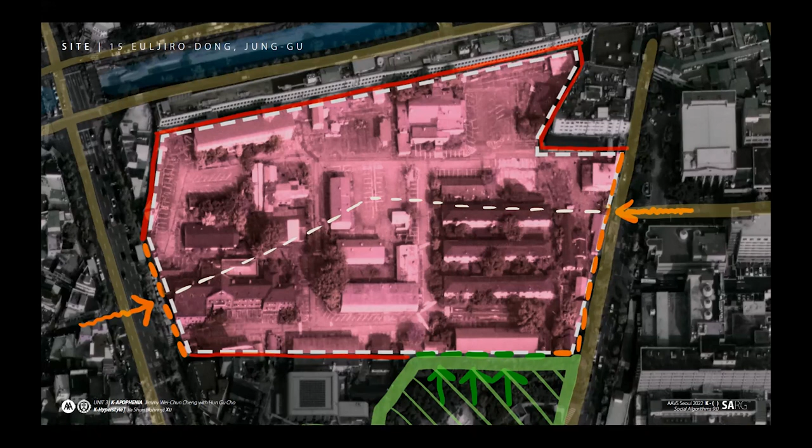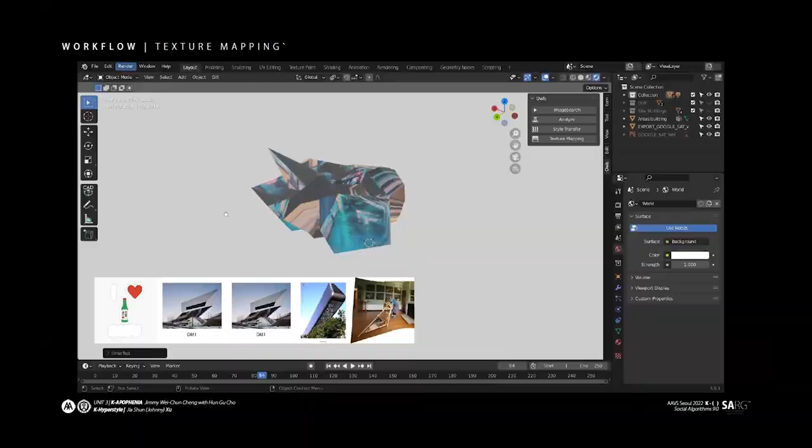We can see that the machine vision believes it closely resembles a soju bottle sticker as the first image at the bottom left, and the works of Daniel Libeskind and high-tech architecture. Finally arriving at our generated outcome, the next steps will look to apply components, sort of as a facade, and then the internal program to further refine the project. Thank you.

The following models are the result of texture mapping and complete additional work. The image at the bottom is a picture that reanalyzed my finished model. I chose the last of these three alternatives, and the result of developing this model is this.

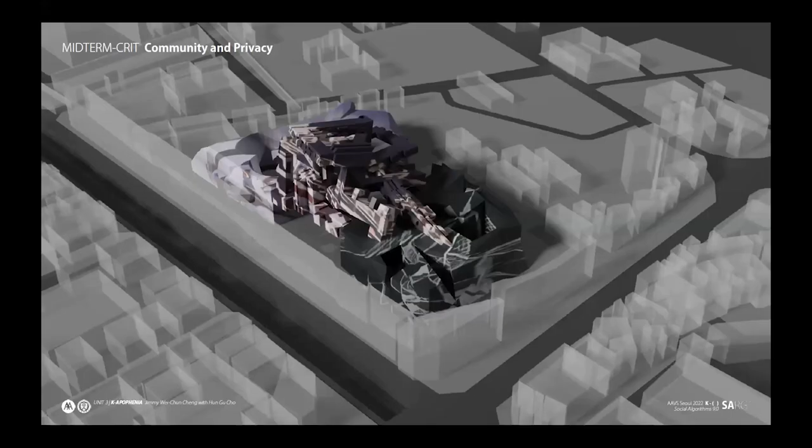I tried to divide the wasted open space into small pieces and save it as small spaces so that space can be actively utilized. I imagined a city that everyone can enjoy, but also gives them their own space, creating a harmonious relationship between community and privacy. So I created a mesh that connects a community space with curved void and privacy space with straight void into a finely divided intimate private space.

And this is the result of re-image search and development according to analysis. I will continue to develop efficient space composition and layout. Thank you for listening.

Hi everyone, I'm Yerin. My project title is The Stacking City. Before we talk about the project name, first I want to tell you my thinking about Seoul.

Korea is a country with higher economic size and population density compared to its land. Rapid economic development, which began in the 1970s, resulted in a vertical extension of volume. High-rise buildings stacked with different programs are densely packed, composing an image of a single elevation. Further, as a means of urban regeneration, the act of destructing and rebuilding has been repeated. Numerous cloned roads connect these dense volumes.

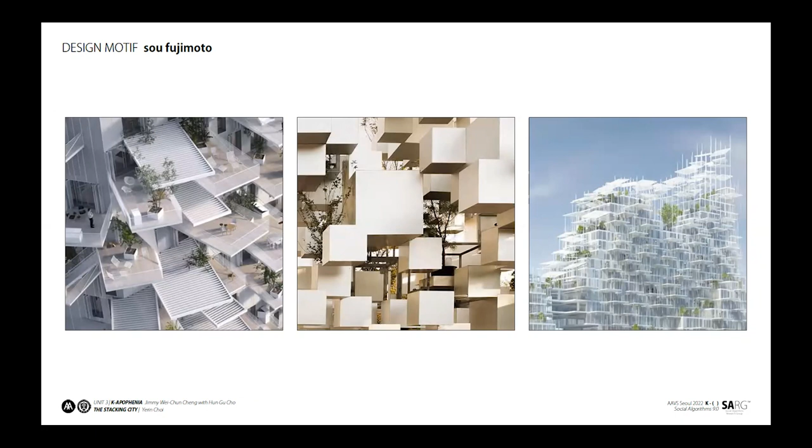My concept is looking into stacking and verticality. I wanted to show the programs that were accumulated over time. I used Fujimoto's architecture as a motif. Units are recognized as programs, borrowing the form of stacking the volume over and over again. This is my alt 1, 2, and 3.

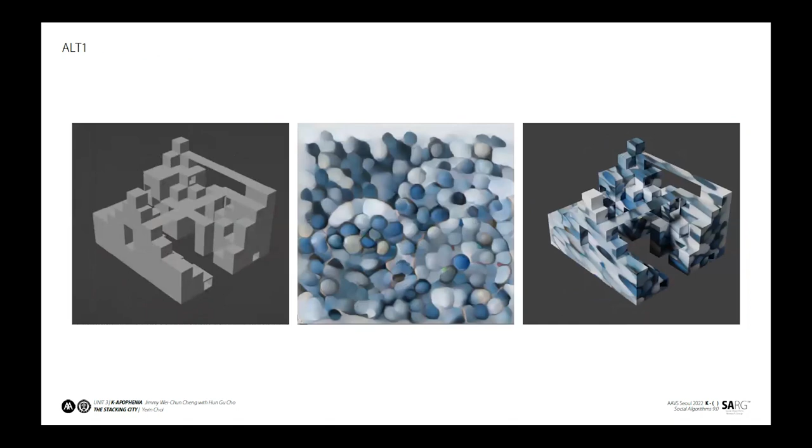When a building is placed within a given site, the surrounding row buildings and my building coexist through the low-rise road. Thank you for listening.

When I thought about Seoul, there are some words that come to mind. For me, I chose them as my keywords, as the characteristics of Seoul are different from other cities.

First of all, the city Seoul has many high-rise apartment complex blocks, which seem like an apartment forest. Secondly and thirdly, Seoul still has Korean historical buildings like Gyeongbok Palace and Buddhist temples, which have our traditional architectural elements. Also, the Han River flows in the middle of the city, so it's iconic and beloved by many Seoul citizens as they love to spend time there.

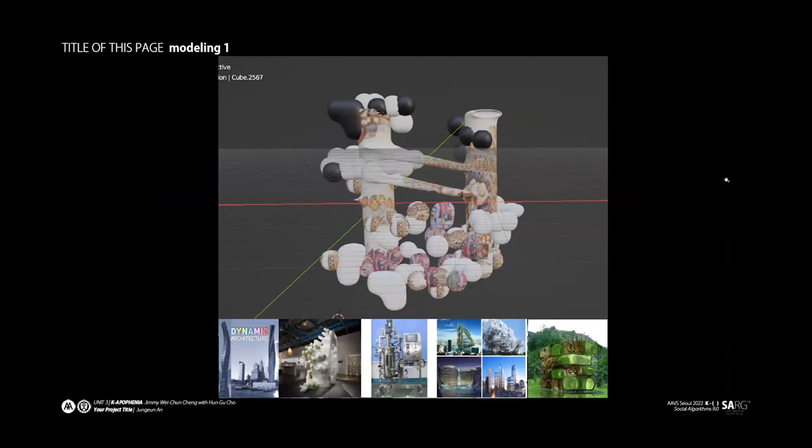This is the first model. The two buildings exist at different angles, and I mixed them with a shape that stretches out like a rhizome, and I applied the material.

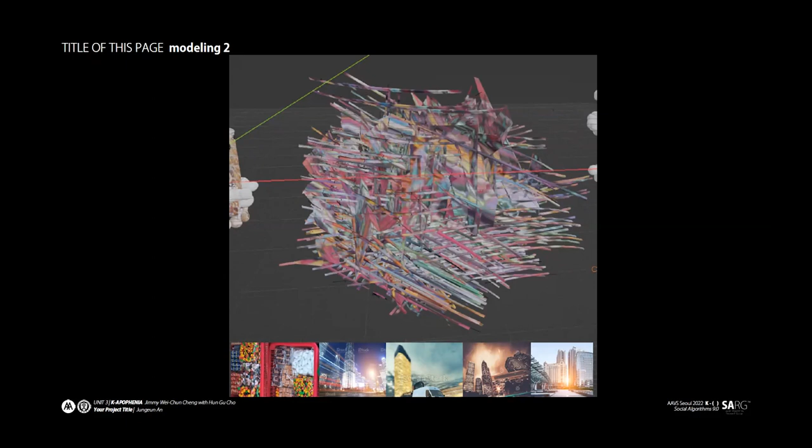This is the second model. I saw fast-moving roads and people working as if there were many networks happening, so I completed this model by creating free lines and filling in the spaces created by their movements. Various colors of Korean food were applied. At the end, I finished it by creating a form that stretches out recklessly.

Finally, this is the rendering of the first model, which I like the most among these three models. Thank you.

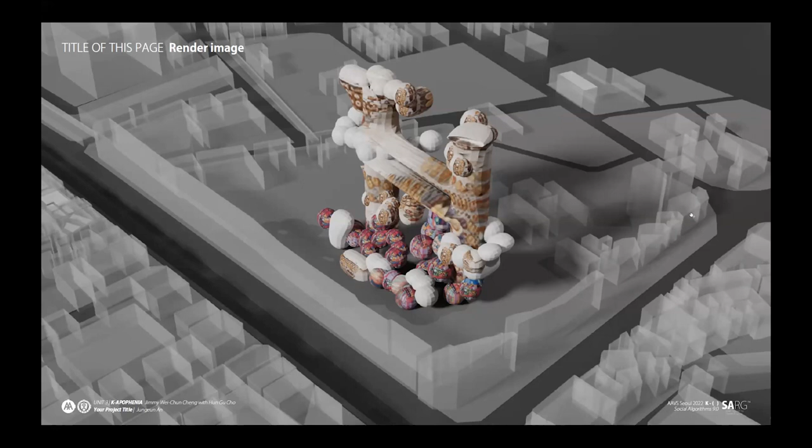Hi, I'm Yeseul. I will start the presentation of Seoul made by the past. First, I collected pictures that remind me of the image of Seoul, and I walked around the site, taking pictures of objects or images that could remind me of Seoul. Through more than 1,000 photos like this, we analyzed the factors that can remind us of Seoul.

I took the topic of the street stall, leaflet, and room space. Seoul lacks land due to its high population density. Therefore, there are many street stalls on the city streets and advertising leaflets posted everywhere to increase competitiveness among many stores. In addition, there are conceptual room spaces which are used as entertainment spaces.

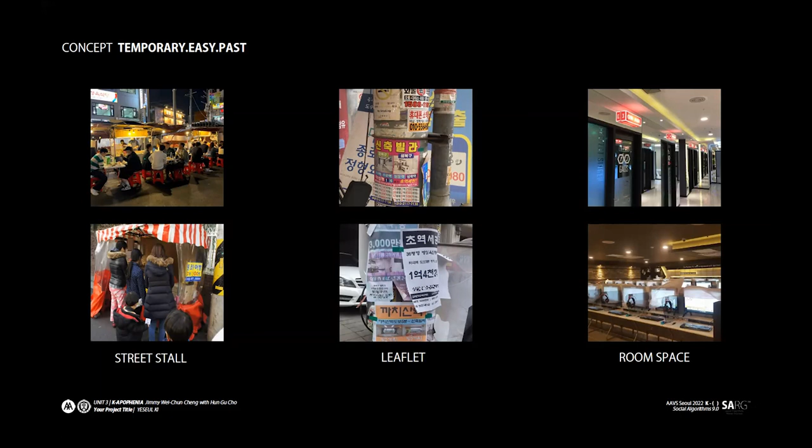It experiences the appearance of Seoul in the past due to street stalls, leaflets, and room space that originated from traditional Hanok. The previously prepared photos of Seoul are made into patterns reminiscent of Seoul's image through mapping.

These are my three masses. First of all, the first mass reminds me of a layer of leaflets. Each side has its own angle and shape that curves inward, which naturally creates empty spaces. The pattern of the first mass reminds of a newspaper, which was intended to express the paper material of leaflets.

The second mass has an irregular buildup of curved shapes similar to roof tiles. The curved shape naturally creates spaces on the first floor, reminiscent of Seoul's streets, and allows for simple installation spaces such as street stalls to be built on the road.

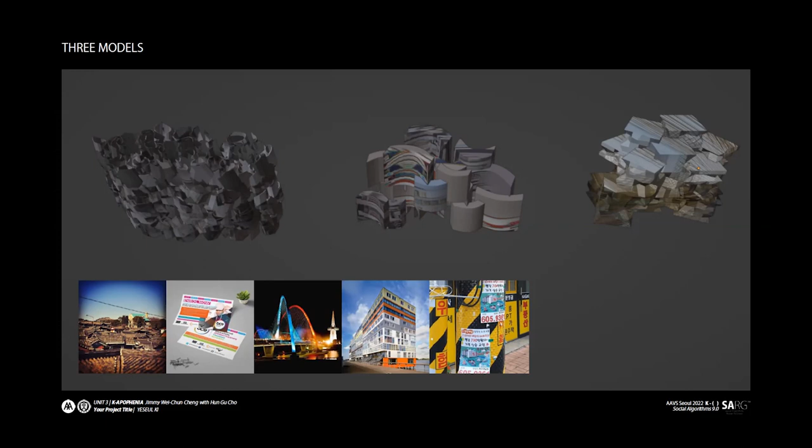The third mass has a shape that comes out and goes in all directions. This suggests a lot of room space for the interior. Masses are placed on the floors to make three front rows, which provide pedestrians with the experience of entering alleys in Seoul. This is my main mass model.

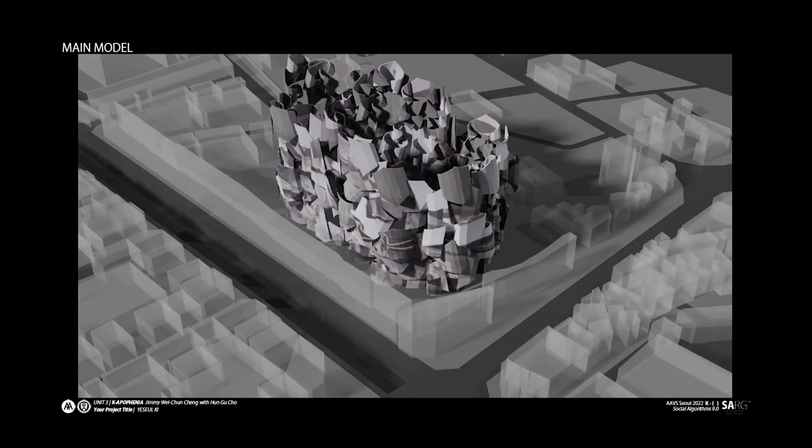The layered shape creates windows and outside spaces with various directions due to the shape of each volume. The inward curved shape also creates indirectly separated spaces, which are used as rooms for different purposes. Thank you.

The next portion of my data set is curated based on my initial perception of Seoul. Since this is my first time visiting, I noticed how fast-paced and efficient it is here, along with being very populated and crowded. For those reasons, I utilized these keywords.

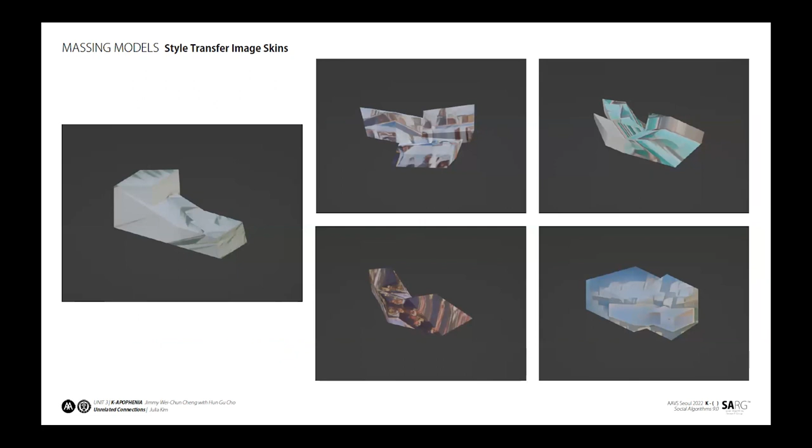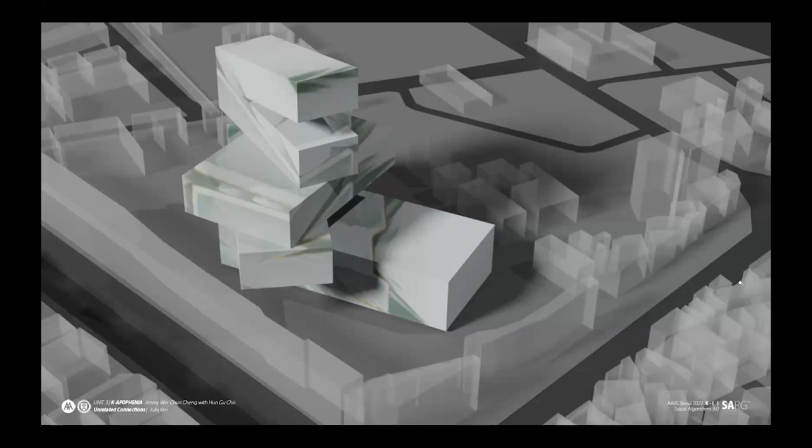This is the process of the image search analysis. This is my final render, and I wanted to create something that contrasts the curvature of the DDP while also remaining abstract and not necessarily blending in with the cosmopolitan architecture.

Hello, I'm Sangtae Kim of Unit 3. Each country has its own unique urban landscape, but generally there are not many opportunities to see a panoramic view of a city at a glance. I would like to show the view of Seoul through the inside and outside of a building and present a new skyline.

My concept is entropy and negentropy. I saw the whole view of Seoul as a coexistence of entropy and negentropy. The view of Seoul is an entropy concept—it's a modern building with its heights and various colors. The view of Hanok is a negentropy concept, assumed to be static, usually similar shaped Hanok.

So I got a data set with the following keywords: view of Seoul, Hanok, OMA, and so on. Based on this data set, I searched for images and analyzed the mass. The result of this process is these pictures.

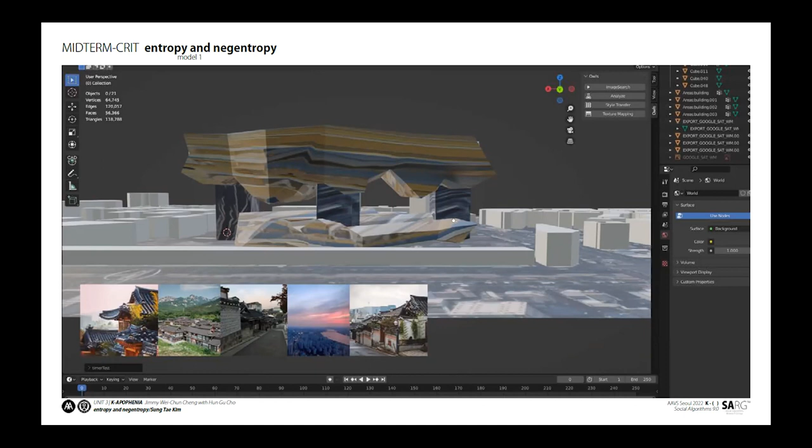The following models are the result of texture mapping and additional work. The image below is a reanalyzed photo of my completed models. I chose the second model among these three alternatives.

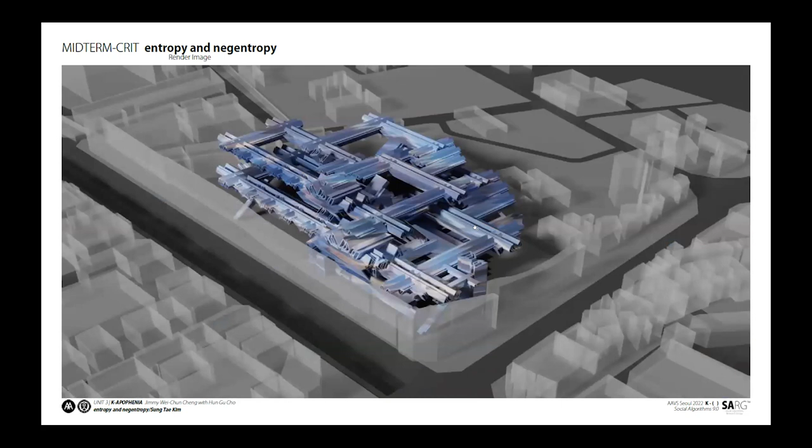So I divided entropy and negentropy through image searches and constructed two types of mass. Each mass was continuously overlapped to emphasize each characteristic. The entropy mass was placed at the bottom to induce free and diverse activities, and the negentropy mass was placed at the top so it could be quiet and thoughtful. Finally, a new skyline is presented with the beauty of Hanok tiled roofs, not the roofs of general buildings. Thank you for your attention.

Hello, my name is Jin. I'm going to present about building a library.

When I explored the site, I saw many shopping malls and busy people. I'm interested that the reflections on the glass of buildings were showing its characteristic in Seoul. So I thought high buildings, shopping malls, and busy people are the components that make Seoul. There are images I searched on Google.

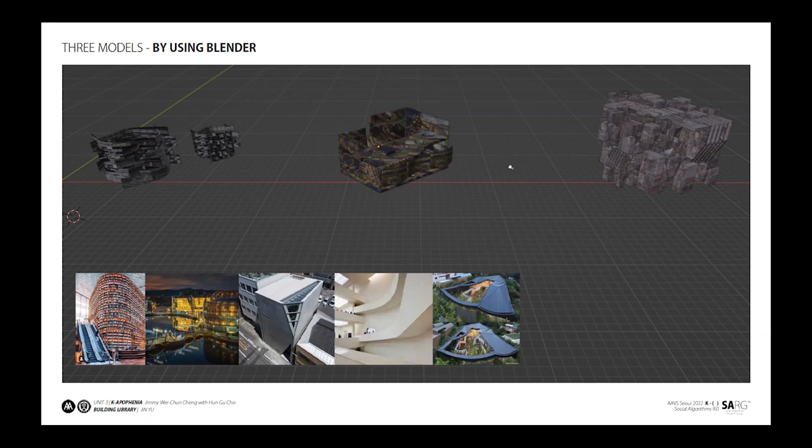In conclusion, I selected the last model because it expresses Seoul well and is proper for a library with buildings and bookshelves together. Thank you.

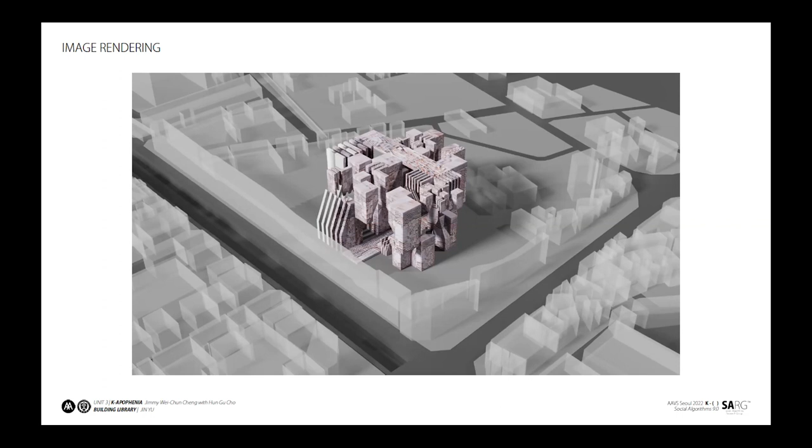Hi, I'm Park Jong-wook from Unit 3, and I'll begin my presentation. To begin with, if you see the picture on the right side, many people will feel familiar with it because this kind of facade is quite common in Seoul, especially commercial buildings built during the 1970s and 80s. I thought the reason people feel familiar with these facades is because they have grids. So I started to search grids of buildings in Seoul.

At the site visit of our project, I saw many building facades and signages that have grids. Also in Seoul, there are many commercial buildings that have grids, and apartments, especially old ones, have grids as well. So I thought this grid of building facades in Seoul could also be the identity of Seoul, and I selected grid as the concept of my project.

Then I started to gather images of building facades in Seoul using an image scraper, which is Python code that scrapes images related to a keyword I typed. My keywords were Seoul apartment, Seoul building facade, and Seoul site visit images. After that, I gathered images from well-known architects to use their design styles as reference for my massing design.

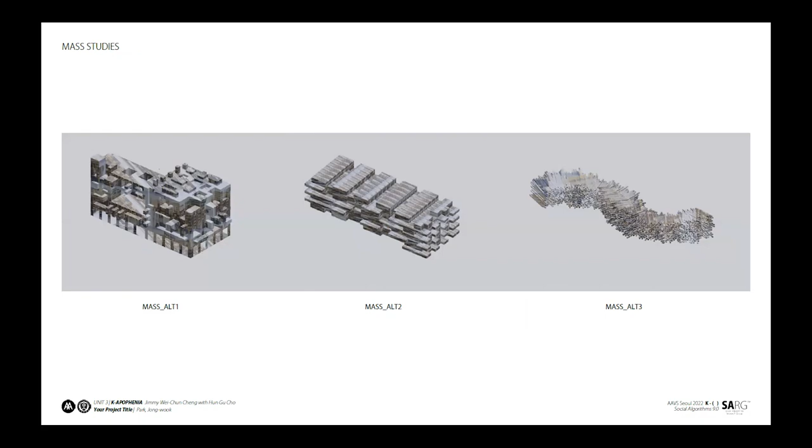With the aid of these images, I came up with three mass designs: Mass Alt 1, Mass Alt 2, Mass Alt 3. We used AI-based scripting, which enabled us to get reference images in real time. So whenever I fixed the form or texture of the geometry, the AI recommended other reference images similar to what I was designing.

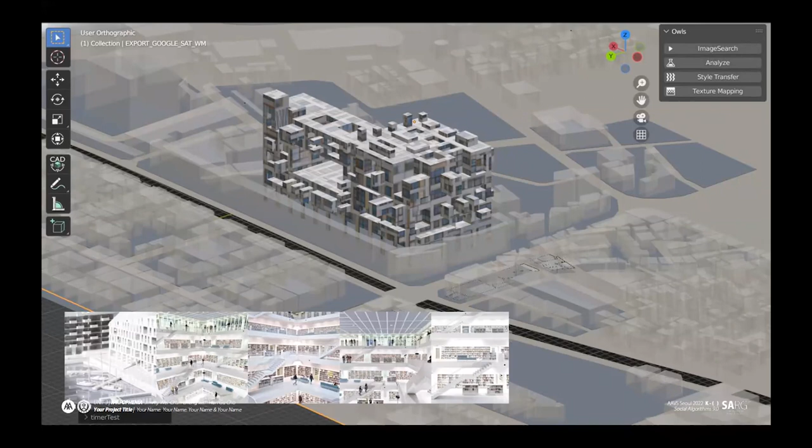The pictures you can see on the bottom are the reference images that AI recommends every time I fix my geometry or change its texture. These are the images of Mass Alt 1, this is Mass Alt 2, and the last one is Mass Alt 3.

After that, we did style transfer, which aggregates the image of the mass design I showed before with another input image shown on top, to make a new image. Those style transfer images are used as textures to map onto the mass design.

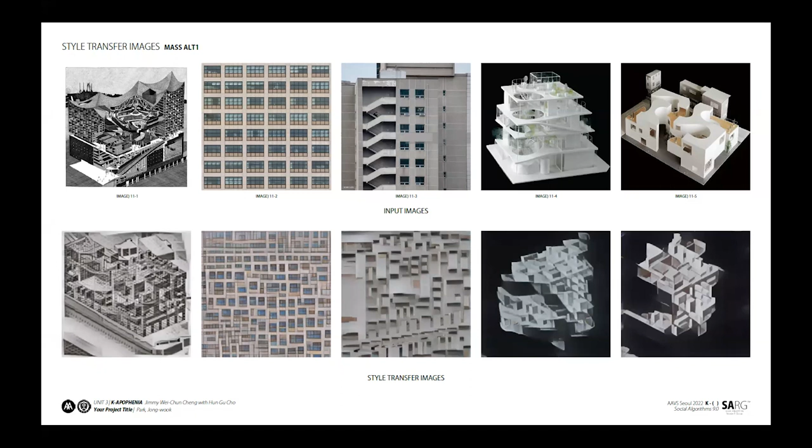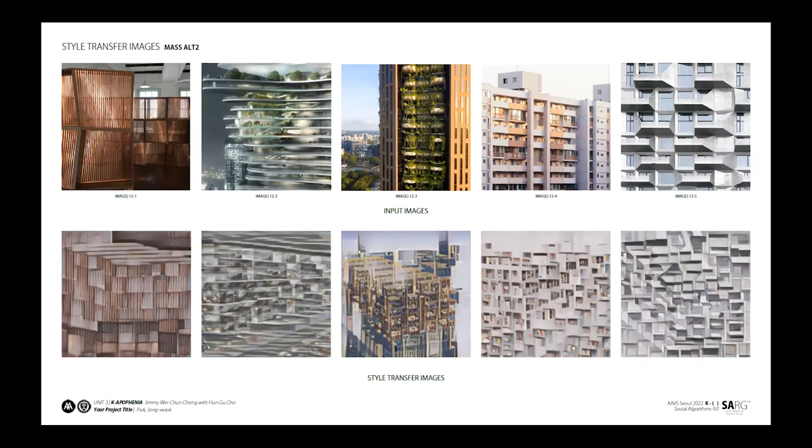The bottom pictures you can see are the style transfer images based on Mass Alt 1. These are images based on Mass Alt 2, and these are images based on Mass Alt 3.

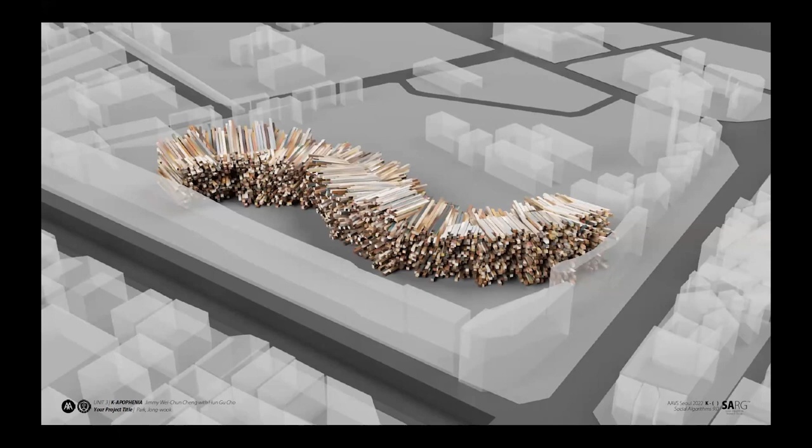Okay, so I actually have two fundamental questions. The first one is: what's the generative massing process? It seems like Unity has a function to display some reference image, and then students just play with some polygon modeling, or is there some other method? So this is my first question.

And then the second question is, what's the reason you utilize style transfer for the texture? I couldn't find the relation and connection between style transfer and the texture, and why it needs to be applied to the texture.

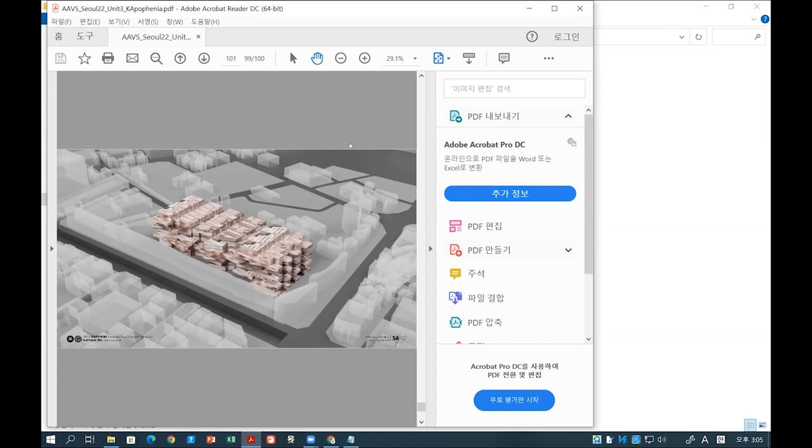To first talk about my personal thought, the reason why we use these kind of AI generated reference images is that normally when we start to do massing design, we don't start from scratch. We don't just open Rhino and start with a box before we search for reference images, whether from Pinterest or these days Instagram. But the good thing about this is that even though you model a box in Rhino, it gives reference images related to that, and from there you can get inspiration and start to move on.

And I also believe that this kind of help can reduce the modeling time. Sometimes, even though we see reference images from the internet, I think it's based on our intention. So even though what we are thinking of as our reference and what I'm really modeling can be different, the AI gives recommendations based on similarity, which is kind of objective. So when I get help from AI when I design, I think I can stay on track and not deviate from the original design I was doing. So I think that is my first answer.

But maybe others can think differently. That's because when all the students present their project, they don't talk about their design decisions when they just extrude some boxes, or why the boxes are shaped that way. I'm just wondering what's the process of their modeling, because I think that's the most important part of the project, but they generally skip that key part, I feel like.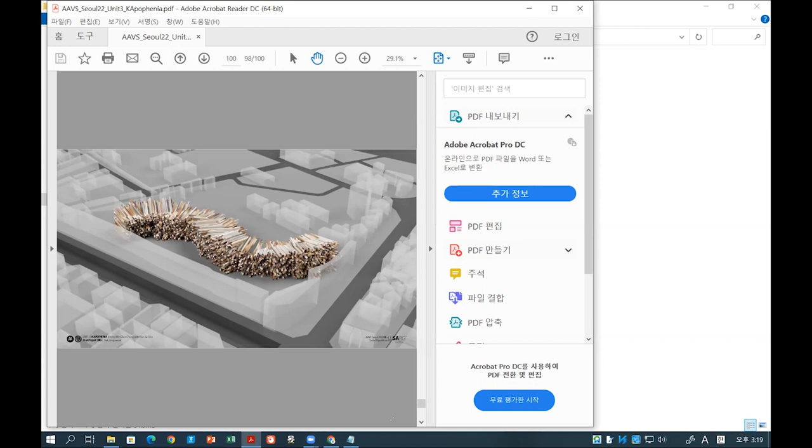But that doesn't influence how this works, how we get the messy model right now, but it could have benefit for the next step, because like you say, maybe you can have a specific goal in terms of how to transfer the pattern to the model. Right now it's the general pre-trained VGG16, just to quickly get an idea, to get a texture on top. But yes, the texture right now is not really affecting the overall geometry.

I'm kind of wondering, I'm certainly thinking about the difference between almost like architecture and sculpture, because one, I think, is still a more direct representation of something, and architecture is maybe more metaphorical. I probably couldn't even generalize that, but what I'm trying to say is that maybe texture mapping is a way to add that additional layer. But so many things are going through my head, I can't actually formulate it properly. But that's the general sentiment that I have.